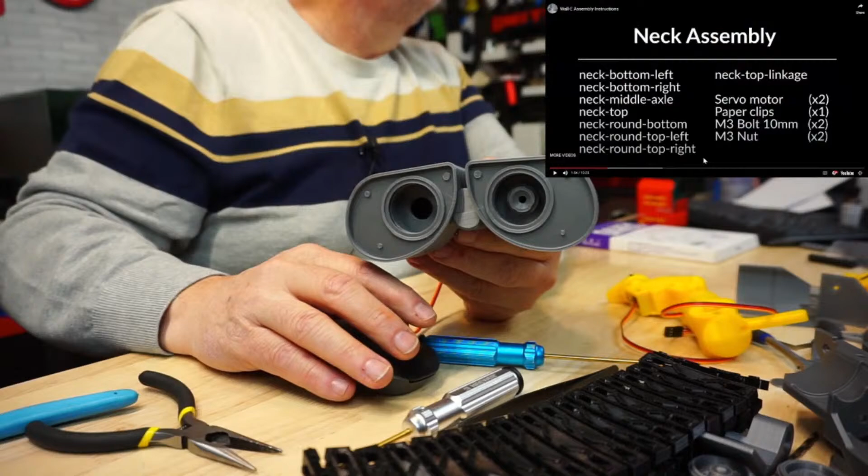I did go ahead this week and assemble Wally's eyes. Let me go ahead and switch over to this guy. So there's Wally's eyes. Now, I didn't put the lenses in. What I've decided I'm going to do is build 2 Wally heads. And the reason why is there, oh, I see, hang on a minute. That's kind of freaking me out over here. That shouldn't be there, this should be this screen right there. There we go, and I'm going to build 2.

I didn't put the lenses in this one because I wanted to get this going and get Wally going. And I refused to buy the lenses that somebody showed me on Amazon because they're so darned expensive. So we're going to do this like this. I've started printing another set of things for Wally's head like this, and these guys and whatever. But then I'll do another one with lenses, and I can just give him a head transplant when it's all done.

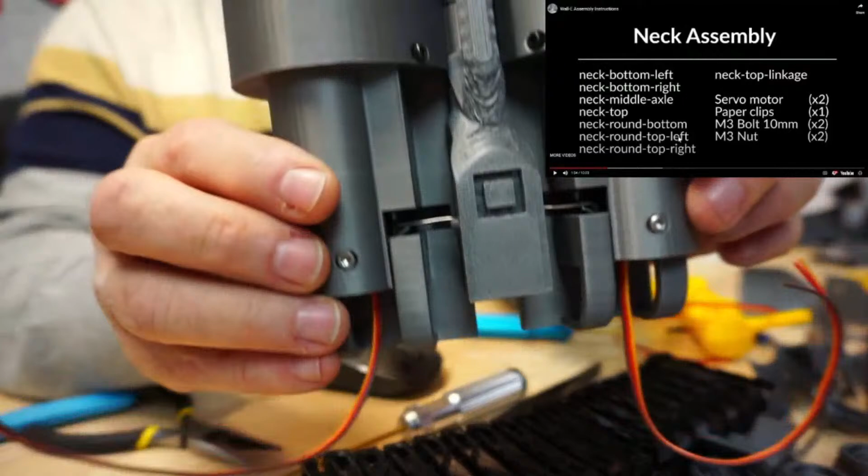But we did end up getting the Paperclips in, and you can kind of see where those Paperclips were connecting. It was a trick and a half to actually get the right length, and I'm hoping I have the right length in there. But we got the Paperclips, which are connecting inside these little grooves here to the servo, which is buried in there. And then they clip on over to this little middle part that kind of connects the whole eye system together. And again, we glue the little tab on the end once we slid that rod in.

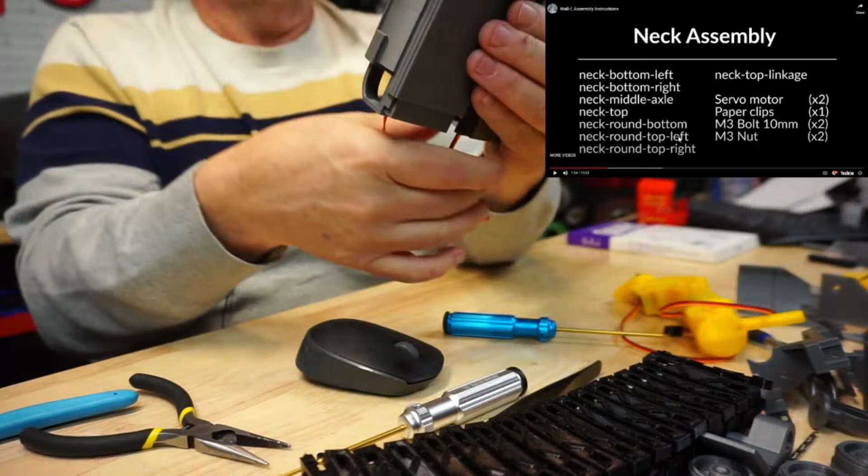And yeah, so that's Wally's kind of eyes all kind of connected together. And then we have, of course, the wires coming out for the servo. Yeah, so there we go. Okay, so that is Wally's head.

Well, that's Wally's eyes. And then we can see here where his neck is going to connect up something like, come on Wally, cooperate. So his neck is going to connect up something like this, or maybe I have it backwards, but we'll figure that out next. So we're just going to continue on with the build.

I did get a pack of servos, it's a 10 pack, I believe I got on Amazon. Yeah, it's a 10 pack, and these are the MG90S servos that we got, and it just came as a 10 pack like so.

So we have all the servos up here and all the servo gizmos down below. We have plenty of servos to continue and finish this build. As I pointed out last time, we have all the electronics in now. There's 4 electronic components, these 3 plus an Arduino motor shield. So we pretty much have everything we need, we just need to get the build done now. I'm hoping I don't run into any more snags.

Okay, so without further ado, and I know this is a mess here. It's a real mess because I still got all these parts on the table, and lots of spare parts, but I think we're just going to go ahead now.

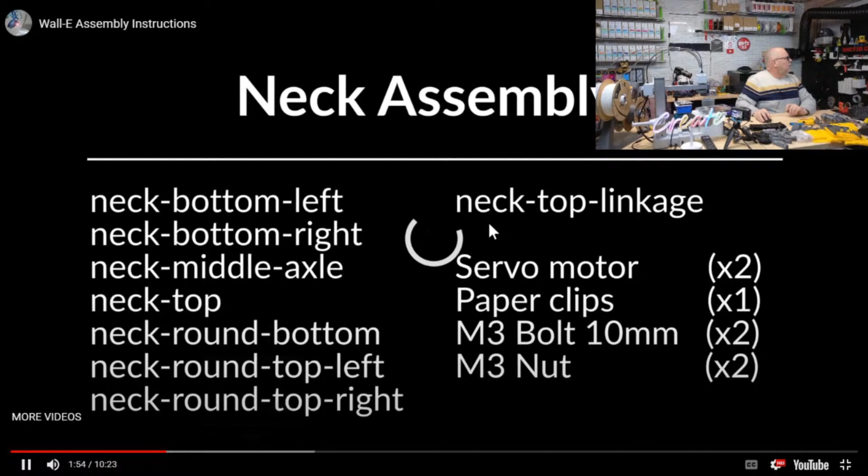Let's just see if this is actually going to play for me. Oh yeah, see, we're lagging. So this is the neck assembly that we just finished doing. Now, there's two pieces I haven't put in yet. I'm just going to let this play for a second. We've got everything done up to that point. Yeah, we're lagging, major lag here. I don't know how that's going to affect my stream. Let's just see what we have here.

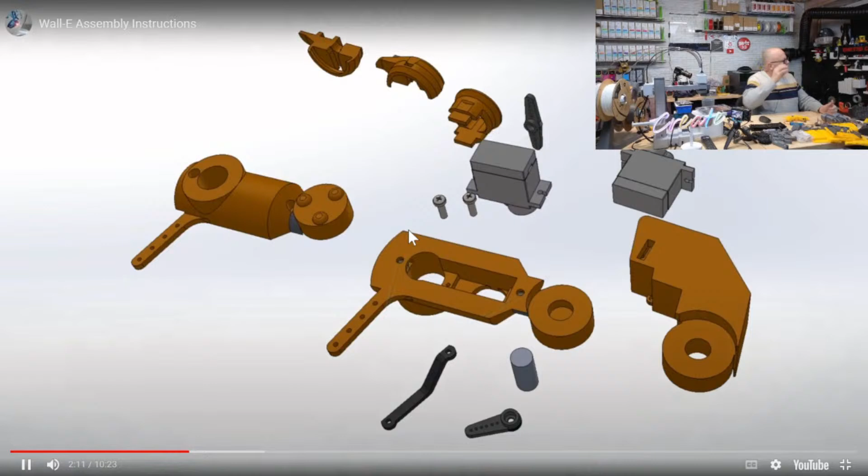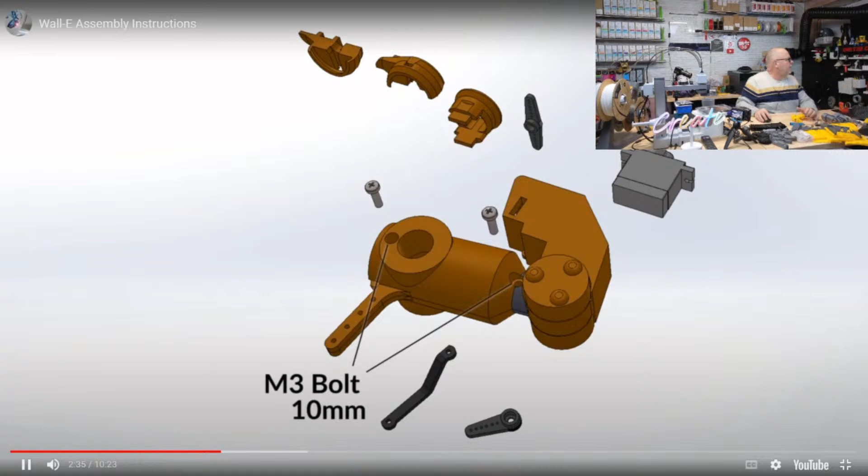So we've done that part, we put that servo in, we've attached these pieces here. So this is what we've done for the neck so far. And then we've screwed those two screws in. Yes, we have. I'm waiting to see what's going to happen with these pieces right down here.

Oh man, as soon as I move my mouse. Okay, yeah, this is just terrible, terrible. I definitely need a new computer, something a little stronger.

So we've done that, we've got that servo in. I didn't see where that piece on the bottom went, so I've got to see if they get to that part. We decided not to, yeah, we did glue those together, and we did not glue that down. Rather, I used the screw to hold the servo part in.

Okay, here's where we're going to add these two parts. This is going to go onto that servo, and then where is this other little piece going?

Use paper clips to connect linkage, more paper clips. Okay, let's just see how we're connecting these linkages. Okay, it really didn't show me where we're connecting, where we're using paper clips. So I'm going to back this up a bit here.

Forgive the lag. There we are. Let's pause that. Okay, come on. This is going to just frustrate me tonight. You watch. Let's pause. Oh, don't do that to me.

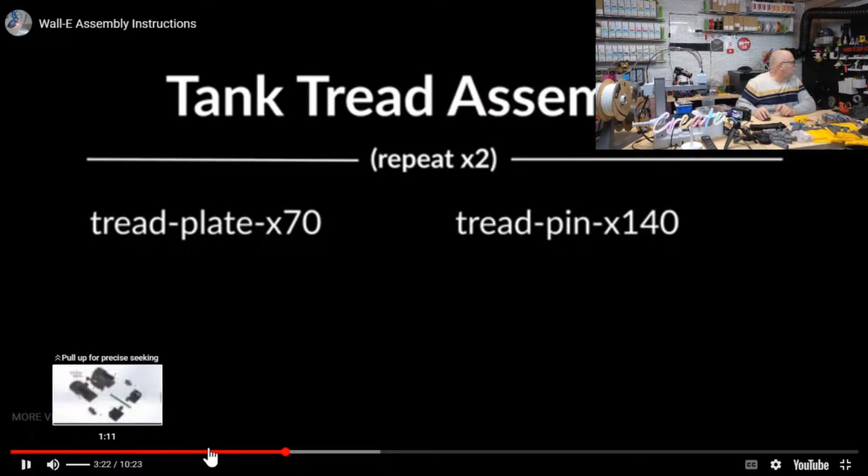Okay, there we go. Okay, so let's get back to, let's do my overhead here. So we have this piece built as they were showing right there. And so I've got that on there.

Likely you're running Windows 95. Yeah, I know, no kidding, right? It's crazy.

So we need that other black linkage piece - it's the curved one. I just got to find that piece. I know I have it right here. There's two of them actually, since I always print spares. So there's the one piece that's looking like this, with the bent piece coming up like so.

And then I need that other piece for the servo. Let's see, right here. It's this one here, with this guy sitting like this. So we need to attach this to the servo like so.

Okay, and then we're going to grab a little screw, which I thought I saw one little screw left here. And there it is. There's a little screw right there.

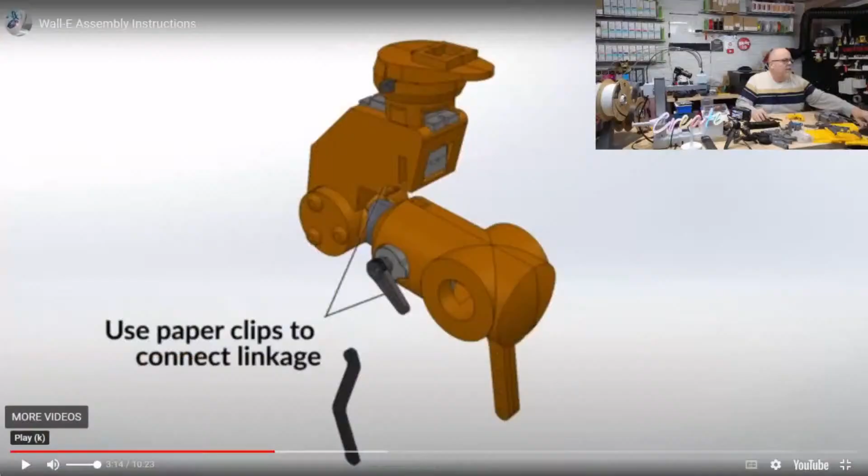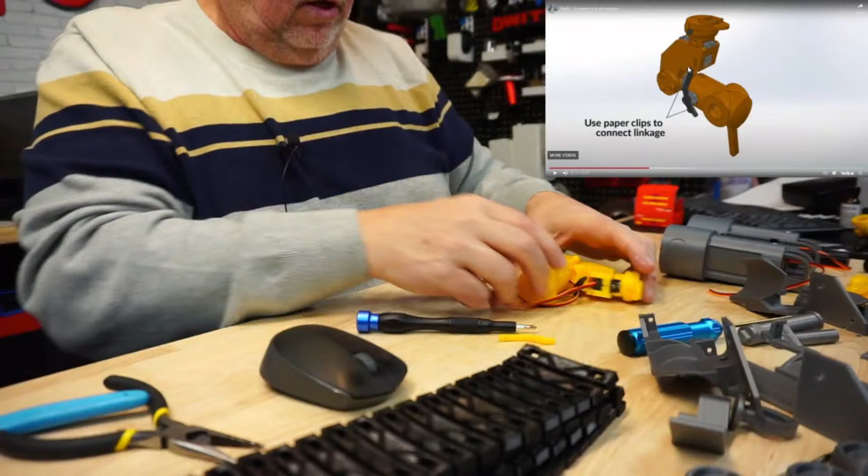And then they say, if you look at this one, they say to link this part with a paperclip here, but they don't show it actually. So hang on, now let's see what they're telling me to link - they're telling me to link that to that with a paperclip. So it looks like we're going in the 1, 2, and the third hole, and then in that little hole on the side here. Okay, so if we look here, looks like they're going in the third hole on here, and if you look right up here, you can see that's the other hole where they want the paperclip to go. So fortunately, because we do have paperclips...

You meant to tag me. Did I get your Amazon US list? No, I don't think I did yet. Oh, stop - I didn't want you to continue playing, you silly little video. Stop.

There we go. Okay, so I'm going to grab my paperclip again. These are much easier to work with than what I was trying to work with last week. Okay, so let's straighten this paperclip out.

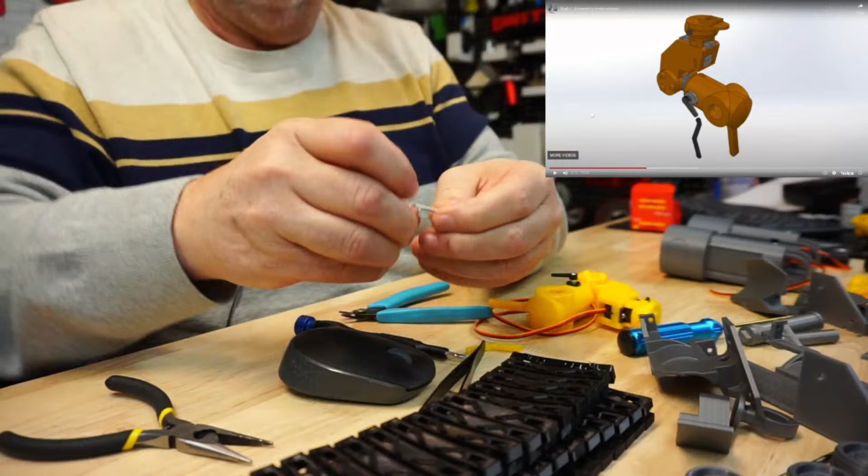Okay, so we're going to cut this piece off. So we're meant to go from about there. So let's make a loop for that first one. Okay, and then this will go up through here, and then we'll twist that one.

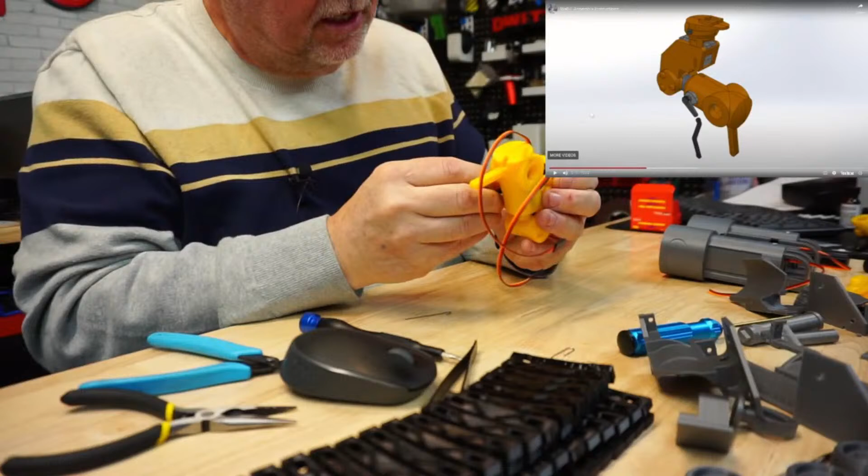So this piece is going to go on between here and here. Okay, oh, so we just need a piece on each end. That makes better sense. Okay, so let's do that. So I'm going to go ahead and put him on like that. We are going to come on and bring this piece on like that. I know it's hard to see. Actually, I'm going to make this bend a little bit bigger, so we're going to make that a little steeper, like so.

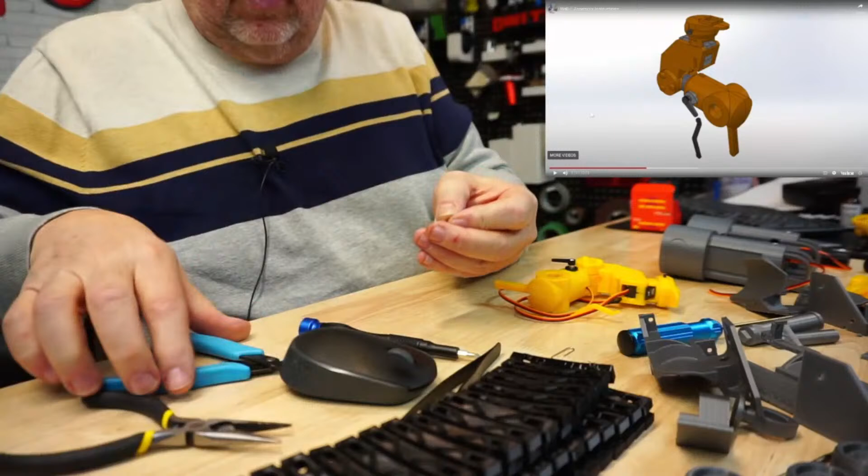And I'm just going to cut this little piece off here. Okay, we'll come up like so. We'll put this piece on like this. That will allow me - you almost need 5 hands here to do this. So I'm going to put that on like so.

Don't move. So easy in the video, right? And then that'll allow me to take this piece, make sure this is pulled up, and then we'll just bend.

And that makes sense now. So the neck isn't going to be flimsy because the neck is the up and down movement. The neck's going to be controlled by this servo. So I'm going to hold that, and we're just going to try and get this piece bent over. Come on. There we go.

Come on, you're falling out of the hole. Tell you, you need 6 hands to do some of these things. But if I can do it, unless you have bigger hands than I have, anybody can do this. There we go.

So now that piece is kind of bent into position. And if I snip this off, let's see where that's going to go into my hand. So then we have that piece kind of tied in there. And now we're just going to put the other one so it ties in onto the servo, like so.

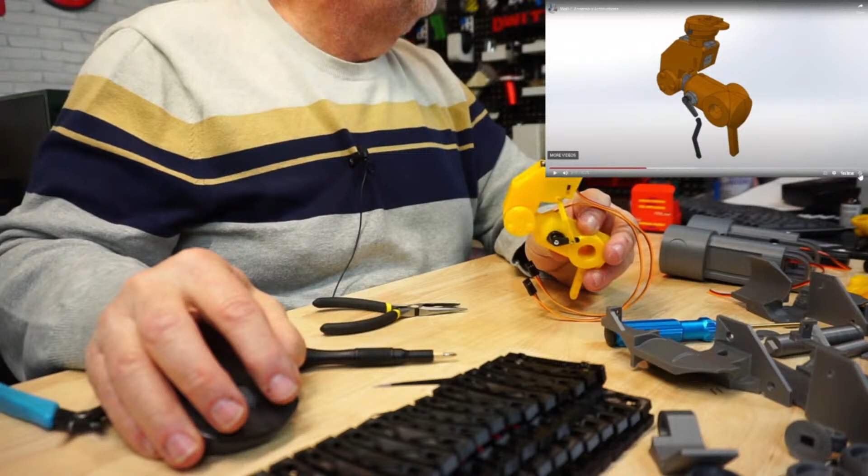The servo is going to control. Oops, sorry. Actually, what I should do here, let me do something for you guys, so it'll be a little easier to see. Let me move this over here, and then bring this back up. It's all about screen position, you know.

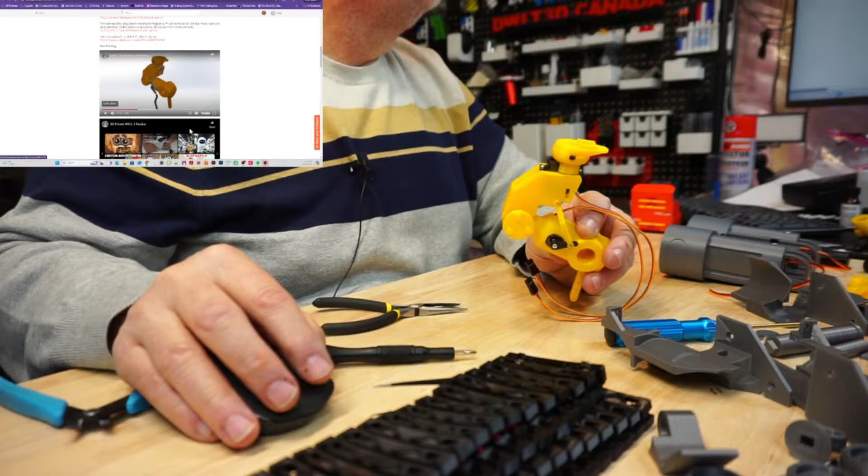There we go. So it looks like now what's going to happen is this servo will control the up and down motion of the neck, like so. Okay, I'm just going to try and get these clips clipped together a little bit better.

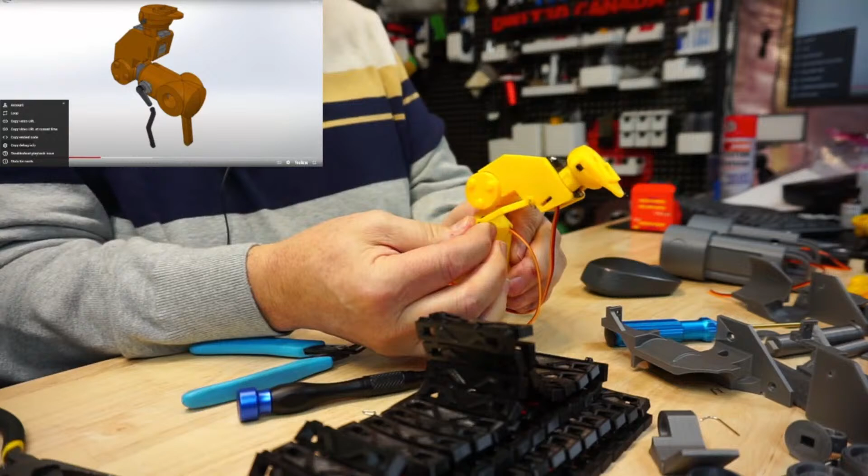So there we go. So now that servo is going to definitely open up and lift his head and neck as we want to see it. So there we go. There is the neck assembly kind of almost finished. We got that on, we got that on. Okay, so let's go ahead and see what is next.

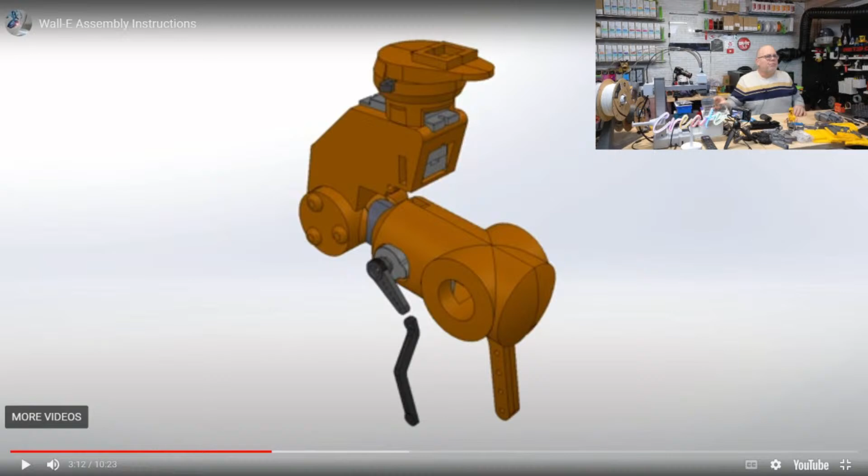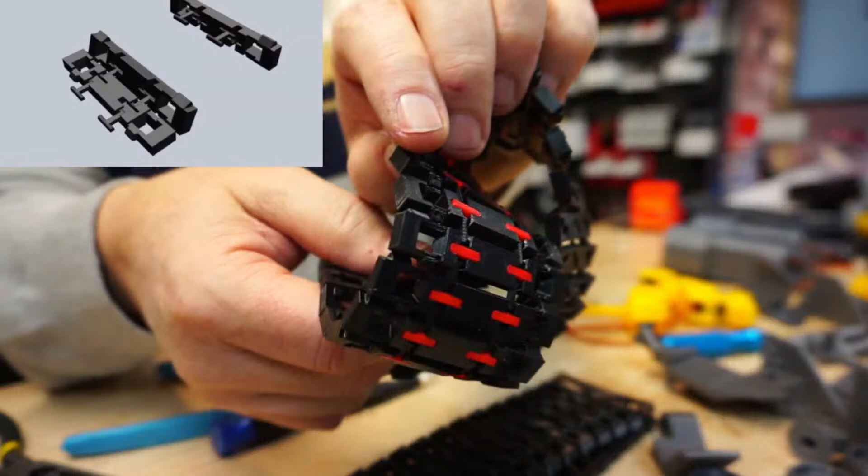Okay, so moving on. We've done this, we've paper clipped that to the servo, there we go. So now we're going to track assembly, which we've done, remember. And remember, in the track assembly we added those little inserts that go right in here, in between these things to prevent them from coming out. That's what we showed you last time, those red inserts we inserted to prevent those pins from falling out. Oh, I think I forgot to put those inserts on Printables. Dang, but I will, I have to. They're fast design, but I will put them on.

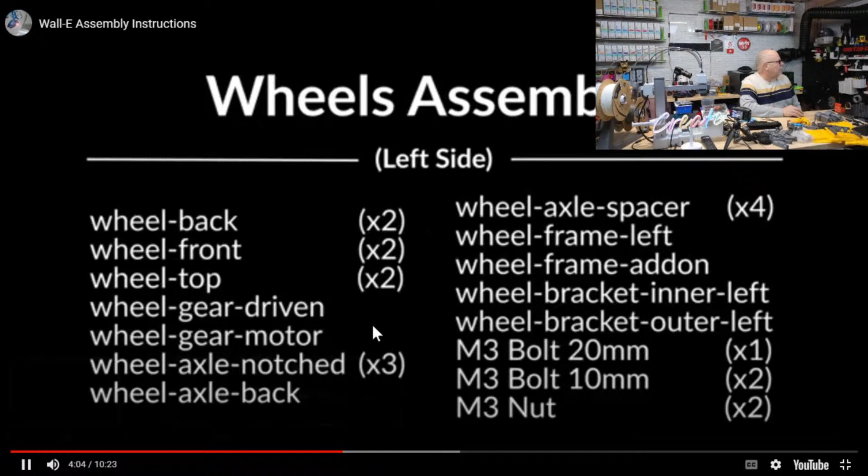So there we go. Now we're going to look at assembling the wheel assembly. Let's go ahead and start the wheel assembly now that I have all the parts and all the servos that we're going to need.

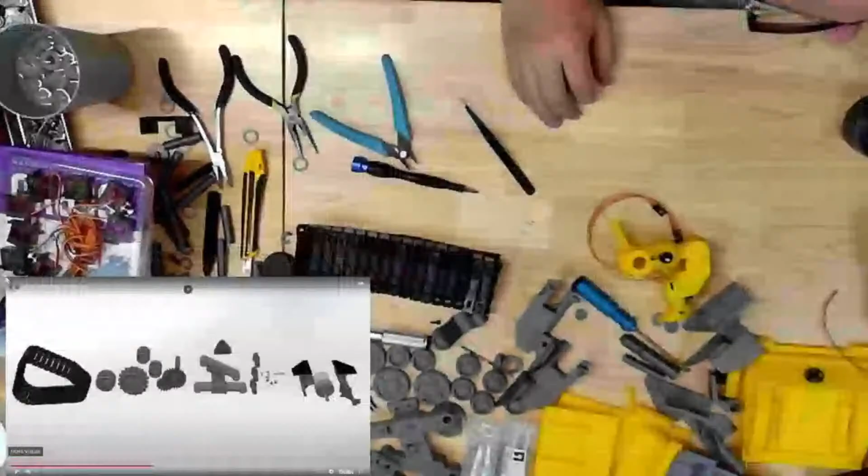Okay, so I'm going to pause it there, we're going to look for these parts. Let's go to the overhead again. So we have our track, there's two wheels we're going to assemble, so we have our track for the one. I'll try and give you guys the same view from left to right, or right to left, I'm going to do it mirrored since I'm watching it here. So we have a track, and it looks like we have two of these guys. Let's move the neck out of the way here. And then we have these guys right here, two of these, okay, these are printed out of Fiberon. It looks like these were the big ones, I believe, here, because the smaller ones are here, and we have a couple pairs of small ones up here.

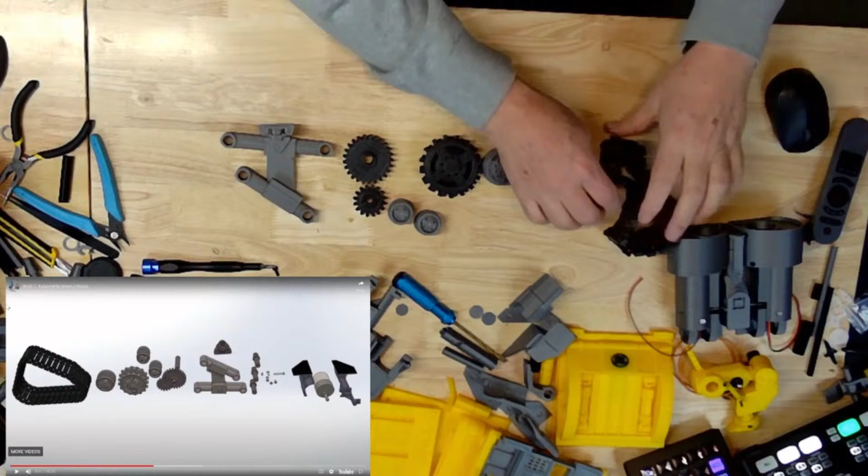So we have this one, okay, let's move these over a little bit. Actually, let's zoom this out so we can see everything that's going on. We're going to zoom... whoops, no that's not the zoom, that's the rotate, oh that works, that works too. So we have this, these guys, these guys, these guys, these guys here, this guy, and then we have three of these, one, two, three of these here.

Okay, we have some screws which we're going to work on. I did not say to go ahead, stop, stop, stop, I did not say to move. Stop, no, come on, the lag in this thing is just going to drive me bonkers. There we go, and then we have, it looks like, this part.

Is this the right one? No, it's this one. We want this one here. Okay, and then the bottom half, which is this one here. Oh, and then the motor.

Okay, there's where the motor comes in. Now this is where I'm not sure which motor I'm going to use. This is where we got to decide on the size of the motor. Let's just pop this one out. I have 2 different size motors here. Obviously only one of them is going to fit. I'm pretty sure one of these is the size they have in the parts list, but we'll find out very quickly whether or not it is.

Oh man, they make Fort Knox getting into these motors. So let's see, I have a feeling this is not the right size motor. Or maybe it is. Maybe it is. Whoa. Let's just see. No, I think it's the bigger one. I think it's the bigger motor I need. So let me grab the box. Here we go.

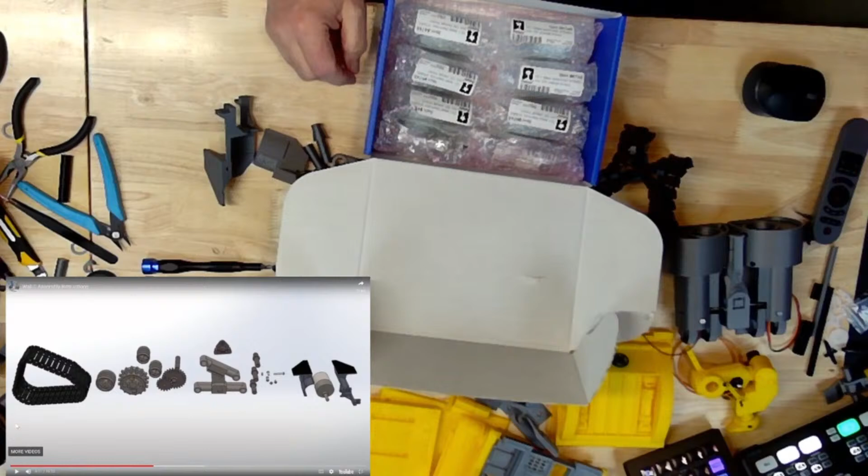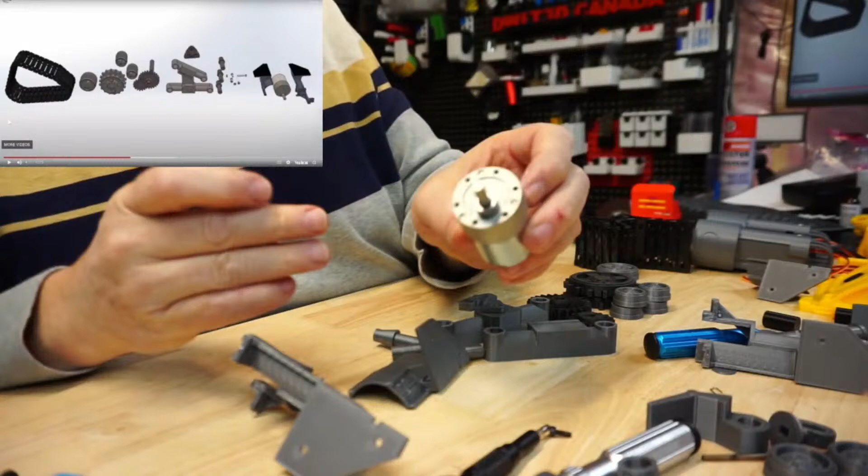Okay, so this looks like a bigger motor. So those are the 2 size motors I have. I think it's this one they're looking to use, but I will find out. Yeah, I'm pretty sure it is, because if you look at this one, it's like a center shafted motor, whereas this one has the shaft towards the bottom, which if you look on the drawing right here, it looks very similar to the larger motor. Good, so they're using a more powerful motor, which is this one right here versus the little one here. So I can put these little ones away.

And we will use this motor in place. Yeah, this looks like it's going to fit in here a whole lot better. Whoops. This guy here goes like this. This motor is going to sit in. Yeah, there we go, so that's going to sit in like that. And this one is going to sit in just like that. Yeah, that's definitely the right motor for this particular project, which is good because that's a much more powerful motor.

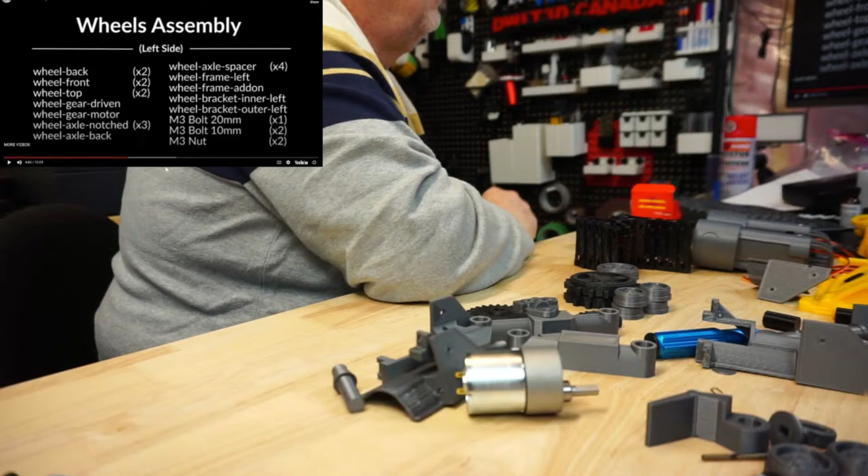Okay, so we got everything there. Let's go ahead. Oh, I just need to see what hardware they want me to use here for screws. So let's go to this screen. We're going to need M3 by 20s, 1 M3 by 20, 2 M3 by 10s, and 2 M3 nuts. Okay, let's go grab those, and we'll get them all together.

I looked at everything and I'm positive I have everything. So we need 1 M3 by 20 bolt right here. Let's put this one away. I don't know where that went. 1 M3 by 20, 2 M3 by 10s. Oh, those are in my other drawer. I'll guarantee that's probably one of these ones. And M3 nuts, 2 M3 nuts, so we'll grab a couple nuts out of here, 1 and 2.

And then we need two M3x10s, which are these guys right here. 1, 2. Yeah, this must be an 8. Okay, so we'll put this back, we'll throw that 8 back in its hole. There we go. Okay, so let's go ahead now.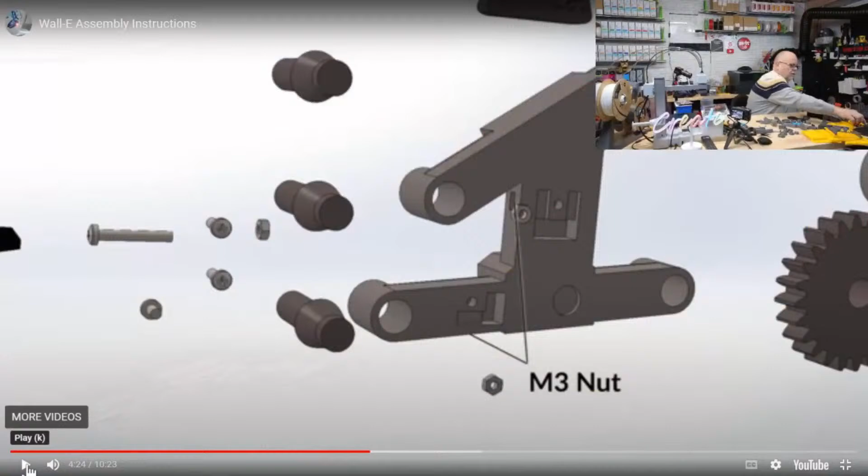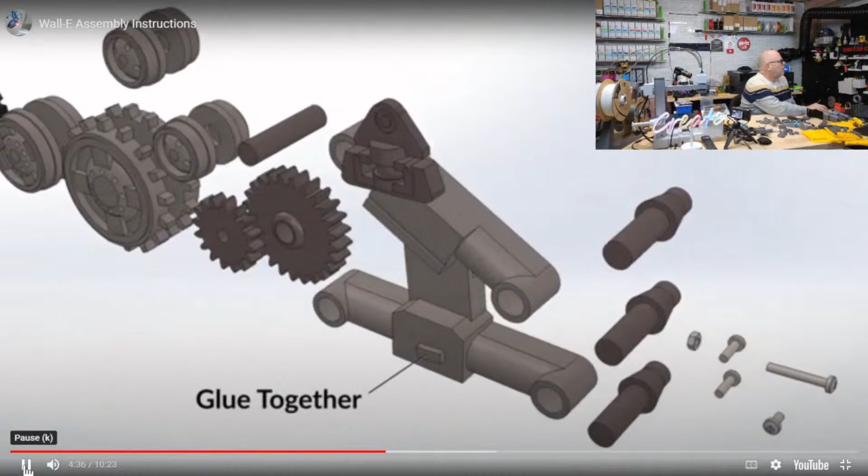Now I'll let you play forward a little bit. Okay, so we're going to come around the back. And we're going to put a couple - I just realized I'm not showing this. There we go, we're going to put some nuts in some nut holes. Okay. And we're going to glue that on. I've already done that, I glued that together already, and I think I got it crooked.

Oh well, but that's okay. You're saying, how can you get it crooked? There's a tab there, I know. Maybe it's not crooked. Okay, then we have an axle that's going to go through the top one - oh, the bottom one. And then these 3 are going to go on. So let's do this, 2, 3. And that's all going to glue wheels on the axles. Okay, so let's get going to that part.

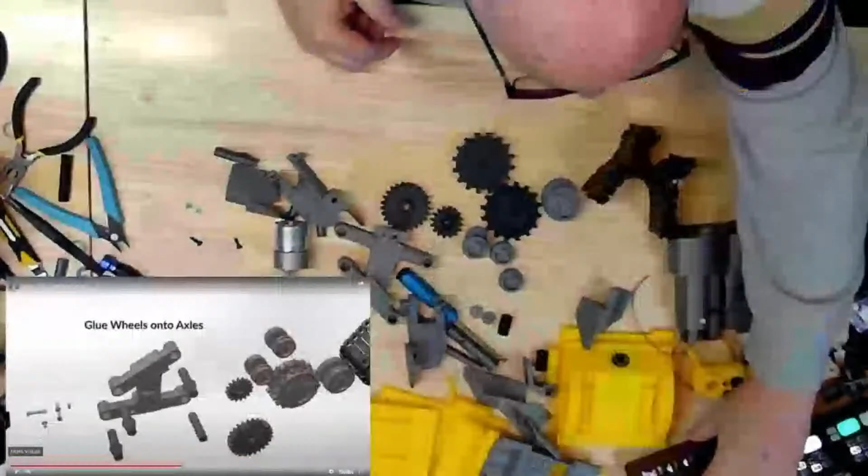Okay, so we have this guy. We're turning him over. We are putting M3 nuts in here. Oh yeah, we turn them over. We're putting in here and in the bottom here.

So this bottom one should be easy to do. Hopefully they're going to sit in there relatively nicely. Let's push it in. It doesn't want to go in. Oh, do I still have some support material in there?

Or did I already put a nut in there? Almost looks like there's already a nut in there. Hold on. There's already a nut in there. Okay, I already put nuts in here. Did I do that last time? I must have. What about the side one? Is there a nut in here too? There is. I already put the nuts in there.

Hi, Timothy. Okay, so we come around to the back here.

We are going to grab, I believe it's that one there. That's what we're looking for. Yeah, I want to make sure that I have 2 the same size of this. Okay, that's these guys.

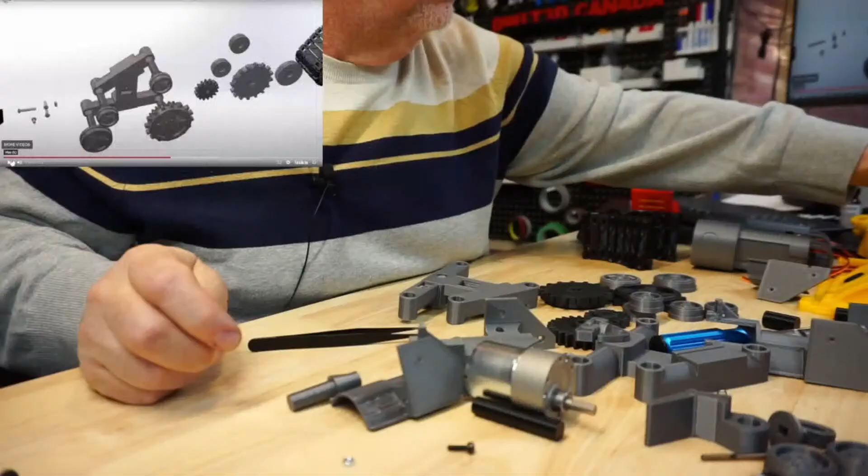Let's see, and these are, I know I printed these in a couple different colors. That's these ones. Make sure, yeah, I printed these in black and in gray, but I'm going to do everything in black for this. So I'm going to have to ream this hole out in order to get this gear in here.

So first thing I'm going to try is I'm going to grab my, where is that tool? Where is my tool?

Is it just you with audio popping and cracking? No, probably not you, just you. I am a little hot on the audio. Let me turn it down a bit. There, turn the audio down a little bit there. It might not be so bad with popping now.

I turned down the mic a little bit. I have a reamer tool here somewhere, right here. I'm going to see if I can ream that hole out a little bit.

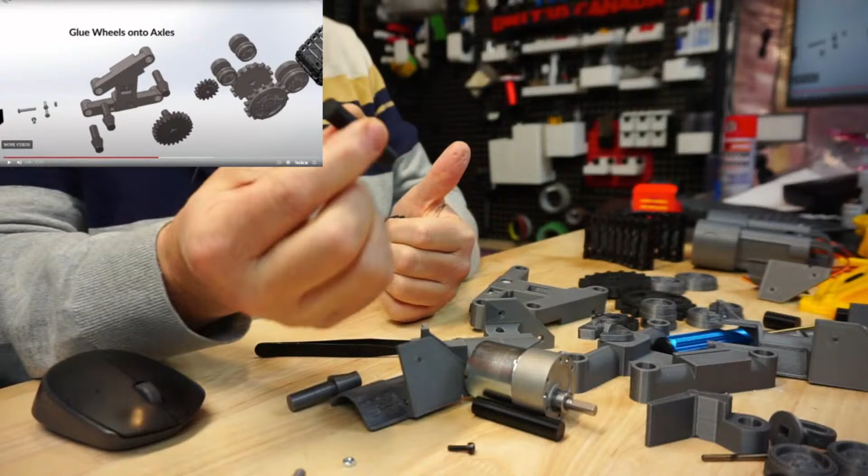Oh, these are really tight. I may have to reprint these axles at a smaller size. I don't have a drill bit big enough to drill that out, or do I? Hang on. No, I don't think I do.

I'm just going to do a bit more, keep reaming it a little bit at a time here. This might work.

Yeah, that's exactly what mine says, but I just haven't had a chance to look at it and see if the wiring or whatever, see if a plug's come loose.

Okay, I just need to get this enough to get that piece in, because we glue it onto it. So obviously, okay.

Okay, let's see now. Oh, starting to get there. I don't want to get that in too far because I won't be able to get it out. But we're starting to make some headway.

This reamer just, maybe if I clean the reamer off. This is doing what it's supposed to do, taking just a little bit off at a time.

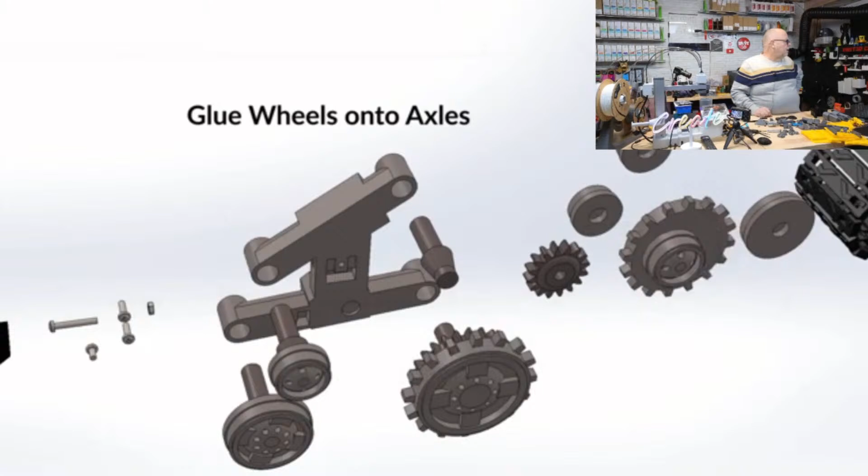And then I don't want to mess with those shafts because look, they slide in there. And then we come on the other side, and I just want to see where that little gear is going to go.

That large one's going there, that's fine. And then we have the caps that are going to go on. And we have these, so we're going to put the other two caps on the other ends.

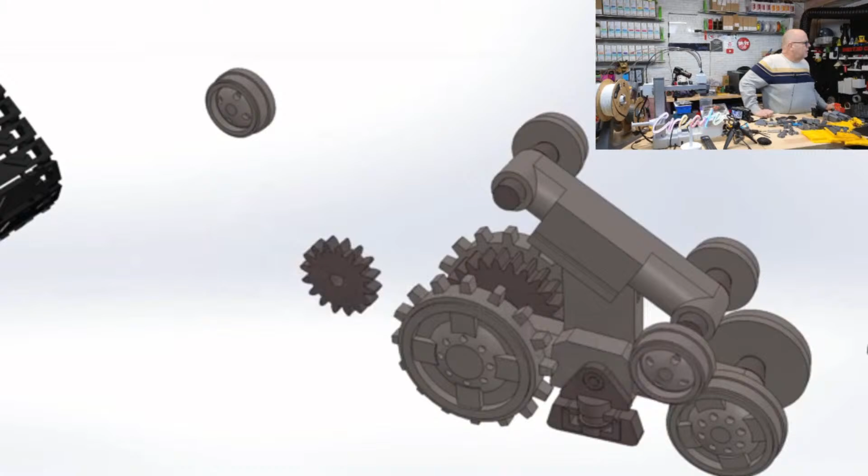Okay, now we put the belt in, which is fine. We do that before we put the last gear or piece on, so that we tension it with this. But where's that last little gear going to go? That's what I want to know.

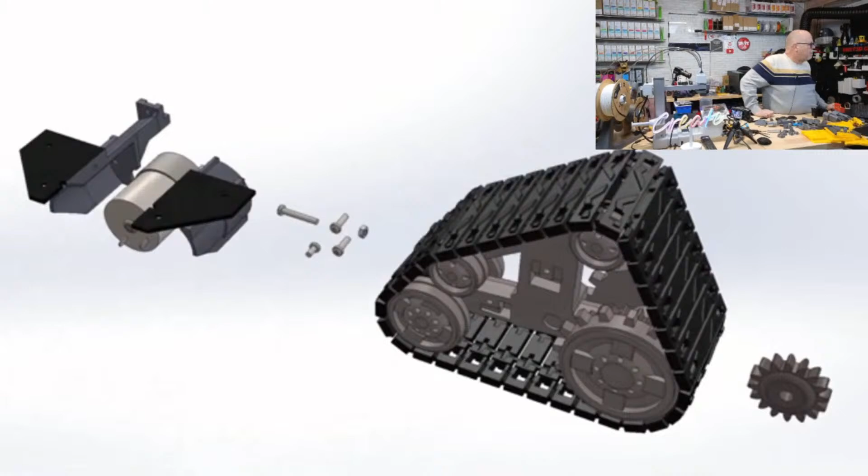Oh, that's the motor. Yeah, that last little gear is going on the motor shaft. Okay, fair enough, let's pause here at that. I see exactly what's going to happen. So this last little one, which is this one, has got to slide over the motor.

And yeah, that's too, oh, that's very tight. Yeah, that's a very tight fit. So all of these gears have to have these tolerances opened up on them. And yeah, that's extremely tight.

What I think I should do - I did these out of Fiberon just because they're gears, but I think if I do these out of PLA, I'll be just fine. Maybe if I do them out of PLA like everything else, I won't have any problems with the tolerances. So let's just put these aside. I think that's what's going to have to happen, unfortunately.

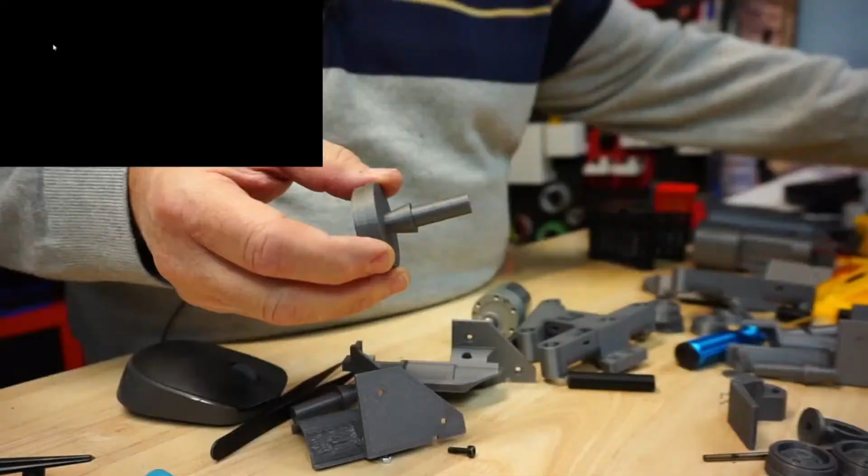That's too bad, but I can do some other stuff like that. For instance, these, if you look, which go on here, I think that's the issue - because of the filament I ran them in, I had a little bit more, I don't even know what you want to call it, but these ones, oh man, that fits on too good actually.

This just pressure fit on there. And this one fit on there perfectly, pressure fit. So these ones, the tolerances were good. Yeah, so those tolerances were fine.

So I think if I just print the gears in basic black PLA, we're going to be fine. I just wanted to do them out of Fiberon to try it because it's stronger, and see how the material printed, for instance. But PLA is going to be strong enough for them as well. Based on this, the tolerances on these, if I print them out of PLA, are going to be just fine.

So let's do that, let's do that. I don't know how long they'll take to print. Let me go ahead and find the files.

There's my files, I got to open a slicer here real quick. And there we go, and then I'll just get these started and we'll see what else we can move along on.

I can at least get part of these things going. So okay, let me make sure the black filament's loaded in here, we're going to run this on the P1S. And this is black, yeah, this is basic black PLA.

So we're going to cheat here, just because I've got this loaded already. We're going to use a non-Polymaker filament, we're going to use some Bambu filament for this one. We'll use Bambu filament for this one and cheat.

See, now my computer, I'm trying to open a slicer, and I'm sure my stream is lagging again.

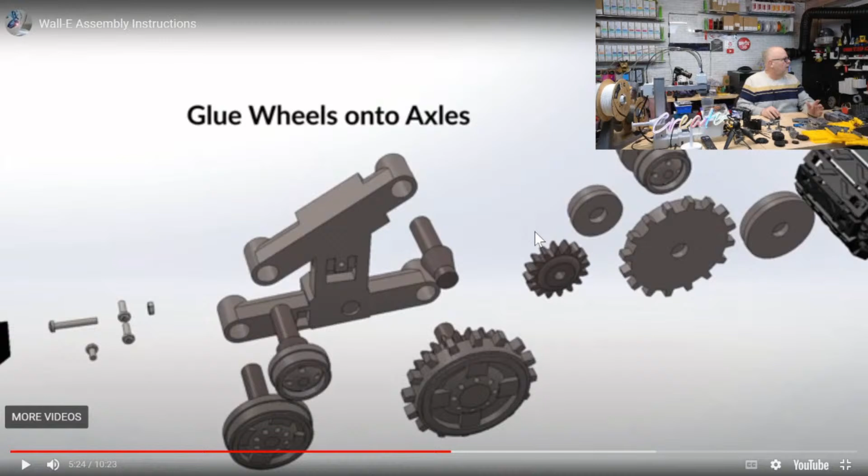Okay, so in the meantime, I'm going to go ahead and work on these parts here. I can get pretty much everything done except the gear parts, so I can get a little bit of a head start. I'm just going to go ahead and get these pieces done that they're showing right here on both sides, because those are just snapped together. It's the gears that I can't do right now.

Yeah, then we flip it over. And of course, we're not going to do this portion, but we can do the other three portions on that. So we can go ahead and do that.

Let's do the overhead here. So I can go ahead, definitely go ahead and do that. So we can come on this side. We've got the large one that's going on the bottom, which is over here, like so. And then that is mating up with another large one over here.

And these don't even need glue. These are really, really tight fit on these. Let's just get this squeezed together. Did that go in all the way? It did. So that fits. Okay. Although you'd think that should go in further, but these are all the same length.

And you have a little one that's going, two little ones that are going up top here. So then on the other side here, again, don't need to glue them because those things are a nicely tight snap fit. But I don't know if that play is good. It doesn't show, but maybe that's for a little bit of wiggle room on the tracks. But these pieces are all printed at 100%.

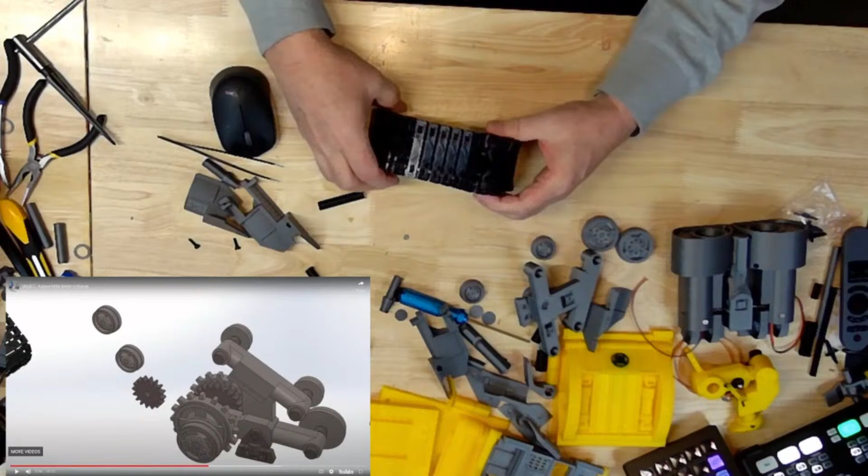Like so. And ride—those are just kind of the track riders. Look at that. Yeah. Okay, yeah, so I guess that little bit of side-to-side wiggle is okay with them. So we may as well do that to both sides. Let's go ahead and repeat that over here. Okay, so we're going to be on the back side here and grab some more of these guys here.

Ah, come on. These things here, when I printed them, I didn't even notice, but the slicer put a brim on them. I got these brims off as best I could, but obviously I didn't get them off perfectly. But I can't find my little deburring handle tool. Where did I put it?

It's here somewhere. Oh, there it is. Oh, no, that's not it. Where's my little deburring tool, guys? My deburrer. I've misplaced my tool. Oh, that's all right, I'll just take my knife.

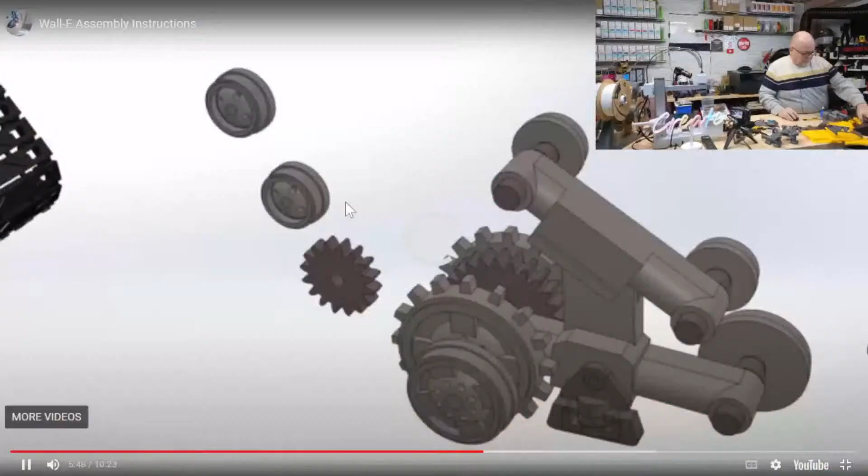I'm just going to look. I think I can get the motor sections kind of put together if we look at the next steps here. You're not missing it now. No, you're not.

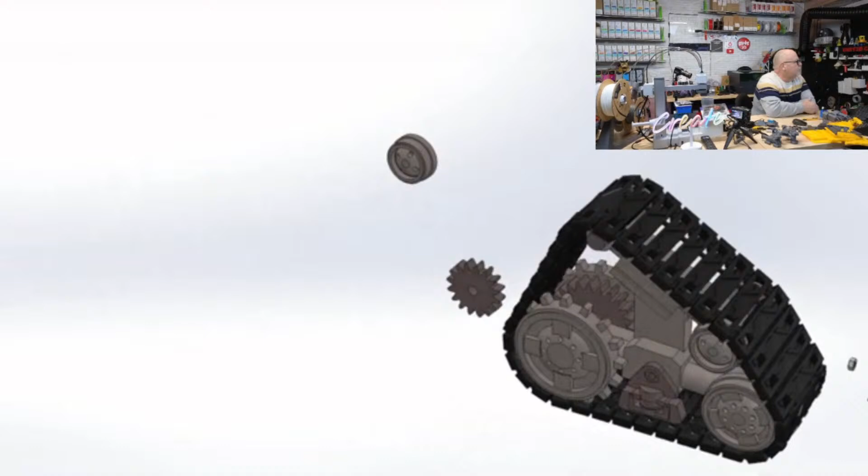Soldering some LEDs for your head -- cool, I know it said tool head. Okay, so this comes into play after this. Once we get all the gears going, we're going to bring the track in, of course. Of course, I didn't need to put that last piece on. I can always pop that off, no big deal. We're going to pop that last piece on.

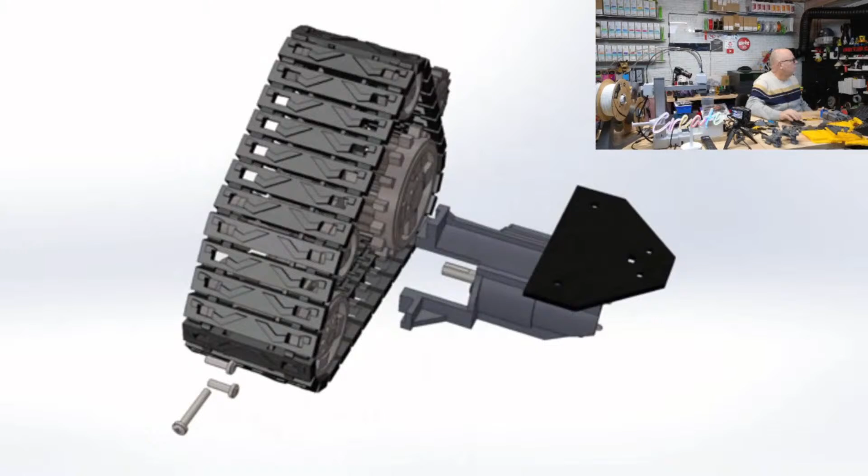And then we are going to enclose the motor. So this I think I can go ahead and do right now. So we're going to shut the motor in. Before we put it in, it looks like the motor is going to close and close. Okay, then it's going to go in and be screwed in place. So I can't do anything -- oh yeah, I can put an M3 nut in there. But that's going to be screwed in place once it goes inside. We got an M3 bolt in there, an M3 6mm bolt. Then we got the gear going on there.

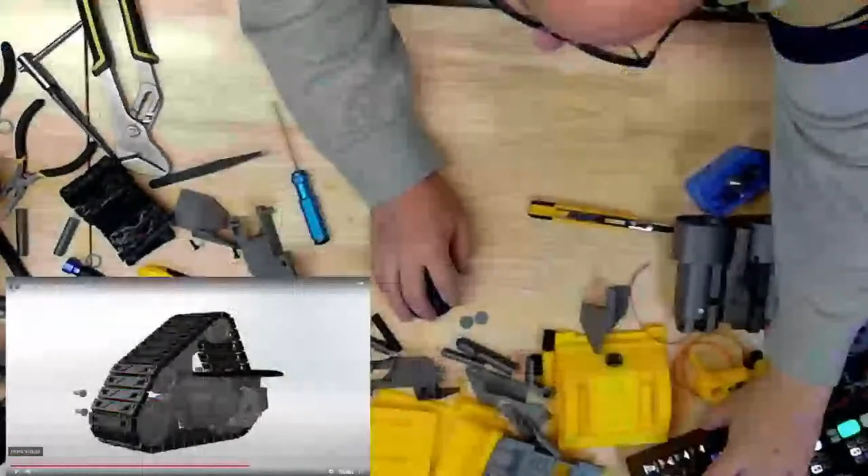Add glue, I don't know. And the whole thing is going to slide in. Yeah, okay, okay, well I think given the fact, let's just see. This was this side, okay.

Like so, yeah, I think we got to wait for the gears to be printed to do that portion. I think we do. Yeah, I don't think -- I'm wondering about that too, Big and Bad Joe. It is a keyed motor shaft. So, but as I say, the motor shaft wouldn't even fit in the motor as well. So we'll see what happens.

I don't like gluing if I don't have to glue, because glue is like, I consider glue permanent. And yeah, you can rip it off, et cetera, but yeah.

So in the meantime, I'm just going to grab a bag here, and I'm going to put -- I've got a bunch of spare parts on the desk right now that I don't really need because they're spares, and I know they're spares. These pieces here, because I am going to build some more eyes eventually, because the eyes actually do have it. Oh, there's the burring tool I was looking for right there. Told you it was right here, it was right here.

Yeah, so I think that's about it. This hand here, which we're not going to need, and that's a spare. Oh, I did 2 sets of motor parts for some reason. And this one we don't need, we don't need this piece. Just trying to tidy up just a little bit here, so we're not so confused. And we have our 2 tracks, which we're going to use here. These are all the body parts.

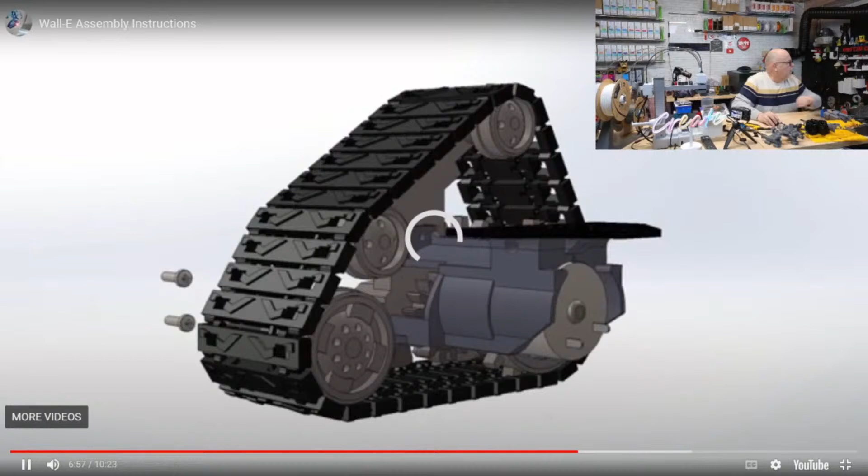Why did I just open? Oh, there we go, okay. Let's see what's going on after we get the assembly done here. So that'll be the track assembly, and it'll basically just say to repeat for both sides. Body assembly, okay, let's see if I can get the body started now.

Oh yeah, look, this looks fun. M3 nut, M3 nut. Oh, we got some servos going here. Okay, and on this side, okay.

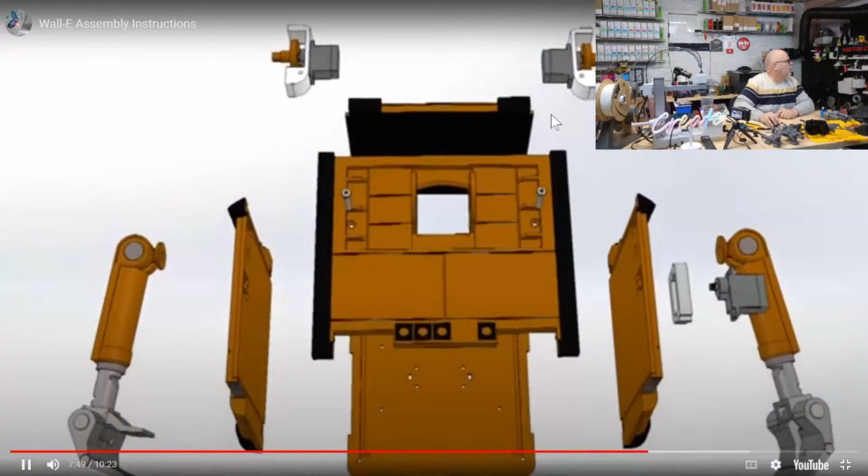Okay, let's pause it here. Let's go back here for real quickly, and I'm going to pause it here. I'm going to see what I need for hardware: servo motor 3, M3 20 millimeter bolts, M3. Let's grab some hardware out of here.

And we need 6 M3 20s. 1, 2, 3, 4, 5, 6 M3 20s, check. 6 M3 nuts. Come on, these are so small to pick up. Here, where's my tweezers? Here we go. 2, 3, 4, 5, 6. 6 nuts. Servo motors, and that's it for hardware.

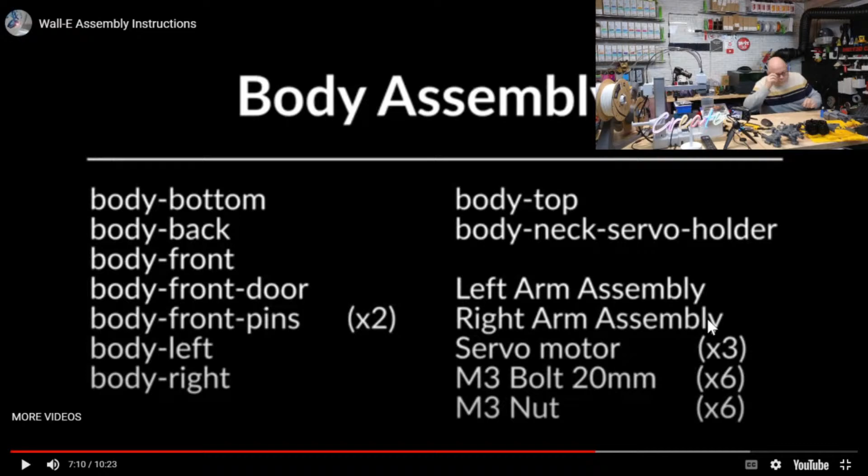Body top, body neck servo holder. Okay, cool, okay. Okay, so we got that. Here's our servo holders, this one and this one. We have a right and a left. Let's move along just a second here.

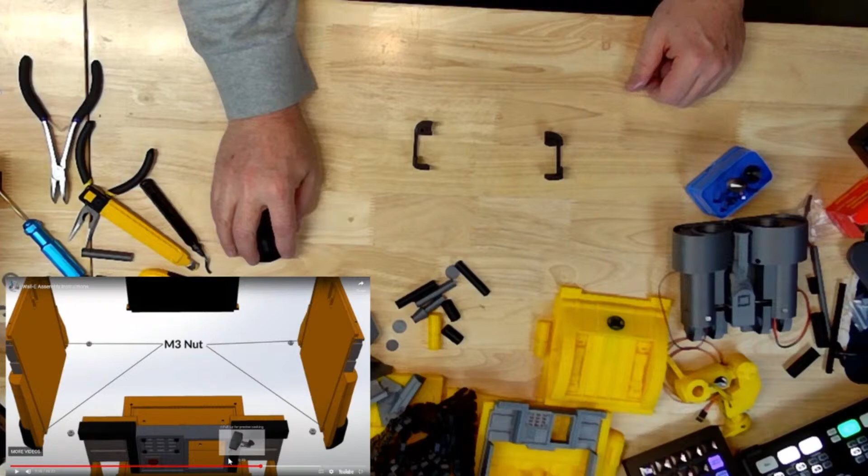So what they wanted here was M3 nuts on the 2 side panels. Okay, so we have our sides, which is, I believe that's one of our sides, and that's one of our sides. Here we go. So these are the 2 sides, and these are the nut holes right here and here, and here and here. So we need 4 nuts in these.

Okay, they're not very -- well, they're kind of just sitting in there. They don't pressure fit at all. They kind of just sit there loosey-goosey. So we'll just let that happen. Come on, come on.

There we go. So truth time here: who's just hanging around for the Polymaker draw, and who's actually hanging around watching me do this?

Okay, and then this other one here. Okay, get in, get in. Come on. There's always one, right? There's always like the one trouble child. Come on, for some reason this doesn't want to go in the hole. And that is one perfectly good looking hole.

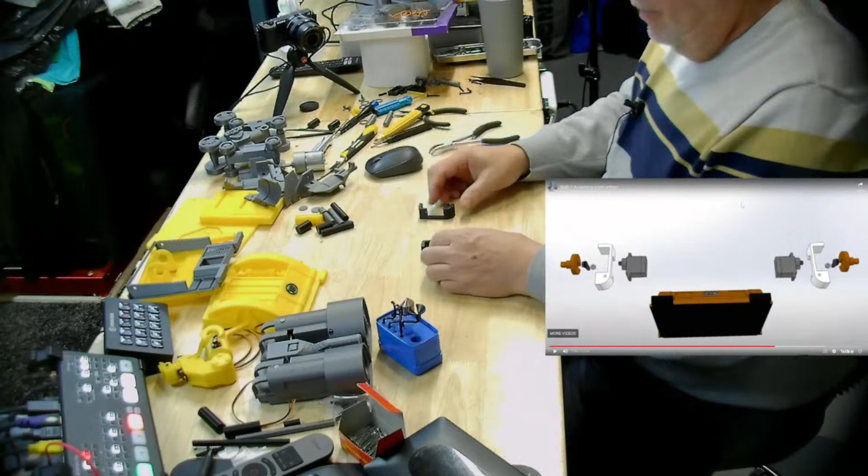Now we're talking, so we did the M3 nuts, we did that. Now we're going to do that funky zoom thing here. Okay, and now we're going to look at the servos. Okay, so we have, these are kind of like that. There, whoops, oh that's funky. And that one kind of goes, so these kind of line up like this. I think I like the overhead a little better for this. These kind of line up like that.

Let's grab a couple servo motors out of here. So we're going to take, oh man, who tied all these up? Why would you do that to me? Okay. Okay, there's one. There's two. There's two motors and two packages for the motors. Okay.

Okay, so then we're going to put the motors in from this way. That one's going to go like that. This one's going to go like that. Okay. And then we have some bolts that go in here -- or nuts, sorry. We have M3 nuts that go in the side.

One nut there. Let's get that pushed in. Actually, this one's nice and snug.

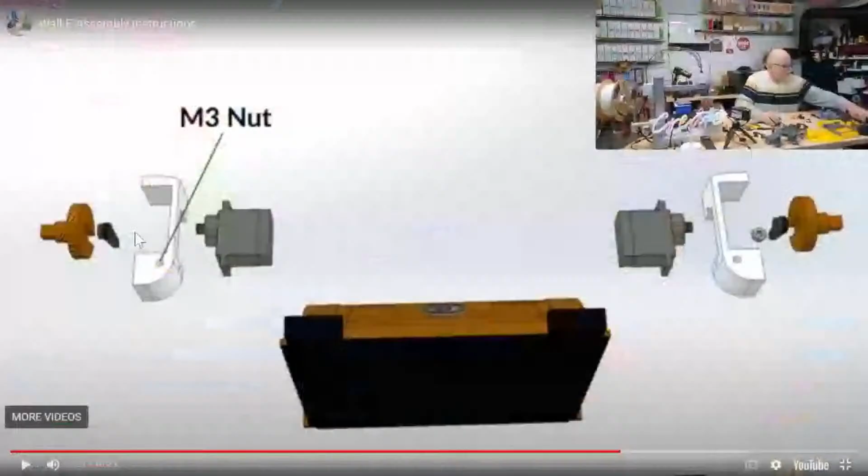Actually, let me back that up for a second. Something looks interesting here. Okay, they're both. This one shows it going in flat side. If you look at this black piece here, it shows it going in here. Let me make this bigger. Shows this black piece going in flat side towards the servo. It shows this piece going in with the long side towards the servo. I think this one's wrong because this black piece is going to have to snuggle up into here in order to make this thing work the servo properly.

What I basically mean is if I switch over to this guy here, where's the other piece that goes with these? This is the other piece right here that goes with these. So what I mean is it's showing one side going in that way and it's showing the other side going in that way. But these are going to have to nestle into that. So I think they've both got to go in with the flat side first. It makes sense because that's the proper way. I'm hoping that's just a misdiagnosis, a misalignment thing on the part of the instructions, you guys know what I'm trying to say.

So this one is going to go in this way, like that. Okay, so I can screw that little one in with here. Like so. Okay, and let's just do the other servo the same way.

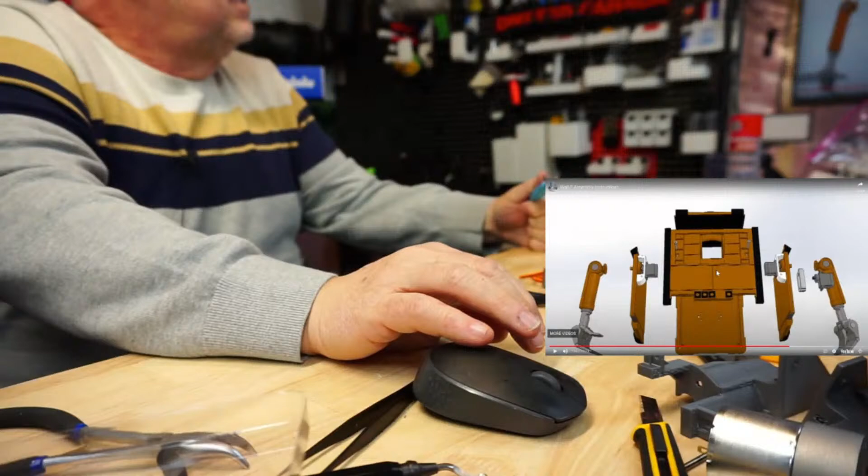I kept the video going too. I didn't want to do that. Stop, pause, pause. Now I'm stuck. There we go, my chair was stuck.

Your printable link gets a 404 error. Oh, shoot. Of course, why not? Let's just join in all the computer error fun I'm having tonight. Slow stream, audio issues.

There we go. That should help that stick on a little better, which it doesn't. So I'm just going to leave these for now. That's okay if that falls off. They don't say to glue that on, so I'm not going to do that yet.

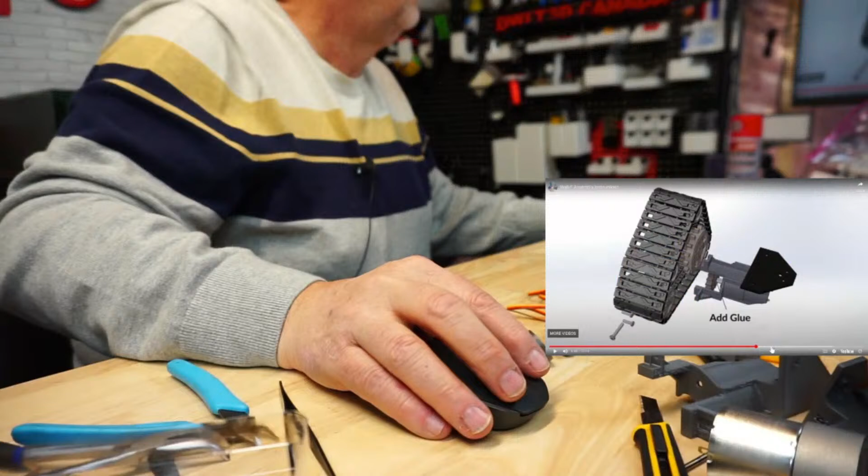So let's back this up just a hair. Okay, so we're at this point. And so we got these buttons. They're not saying to glue, which they are, mentioning glue when you're going to do glue. Glue together there now, okay.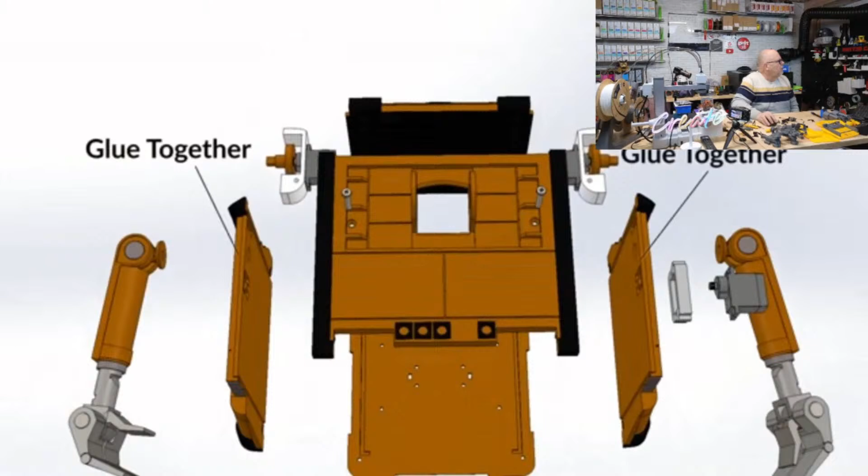So those go in those holes. Just want to back that up a hair. And let's pause this at the right spot. Right there, okay, so those are the side panels.

So this one here goes, we got to get this piece to kind of cooperate in here. And this goes in here like so. Oh, and this just all glues together like that.

Okay, and this is obviously the arm, where the arms are going to go. So that's why this doesn't have to really sit solid on that servo, because it's all glued together. See, that nut fell out. I knew it would. Both these nuts are going to fall out. Let's just leave them out till I need them.

So that's going to glue onto that one. And then this side, again, these nuts are going to fall out. Well, of course, these ones aren't going to fall out. And then this one glues onto this side, like so.

Okay, fair enough. So these are going to glue just like that. Yep, exactly, Brent, that's what it does.

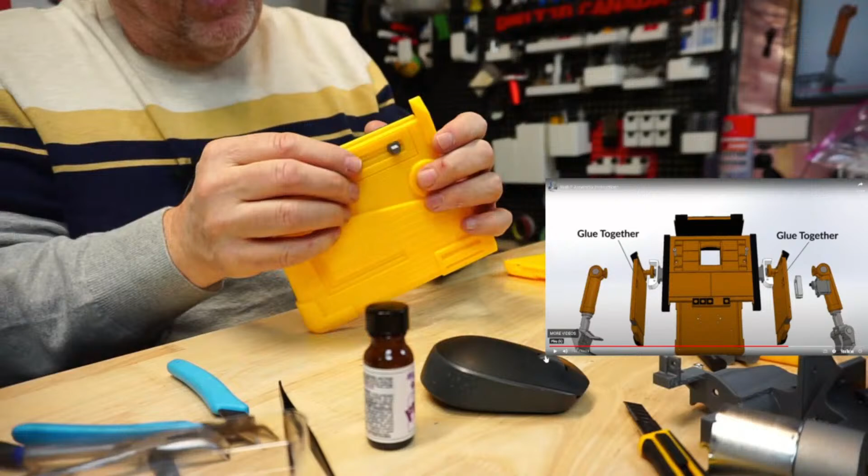Make them stay. Although, yeah, because I can still access the servo here even if I gloop these pieces on. So theoretically, I can just glue this one in place right now. No, I can't, because this has to turn. This has to turn, so we're not gluing that into place.

We're just gluing the black part into place. Yeah, because that's got to stay turnable. Yeah, I almost thought, oh, I can glue that on, and I'm wondering why aren't the arms moving? Brilliant, Tim, brilliant.

Oh, that gloop is dried out. See, I don't think I put that bottle back together properly. That is dried out. What about my other bottle? Is it okay? Oh yeah, this one's okay. Yeah, I didn't have that other lid on tight enough.

So if you're using your gloop, make sure that you put your bottle lid, your top, back on properly, or you'll dry all your gloop out.

Okay, and then we're going to gloop these things. Right here, and right here, and right here. Here we go. And let's get them in the hole. And we're just going to hold that for a few seconds, let the gloop dry.

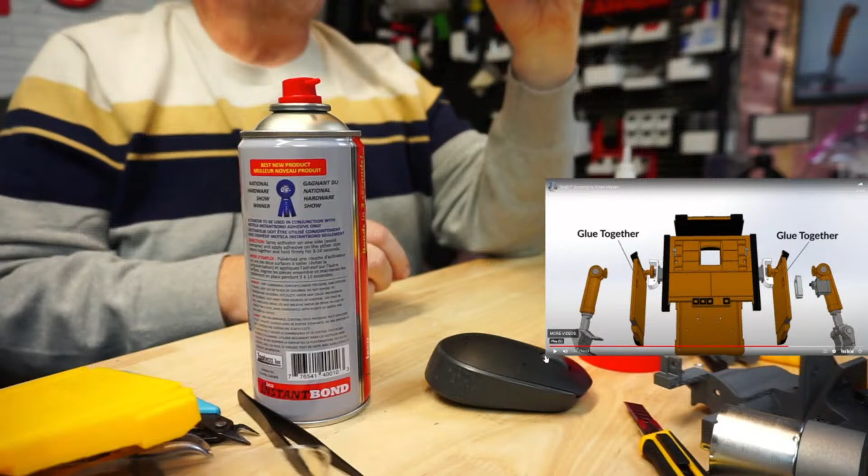No, they're both PLA. That worked. Yeah, that worked with my activator and my super glue. Something's weird, maybe there was a little bit of a springy action going on, so there might have been not a flat piece. But the activator stuff works extremely well in a situation like that. So maybe I activated the gloop too.

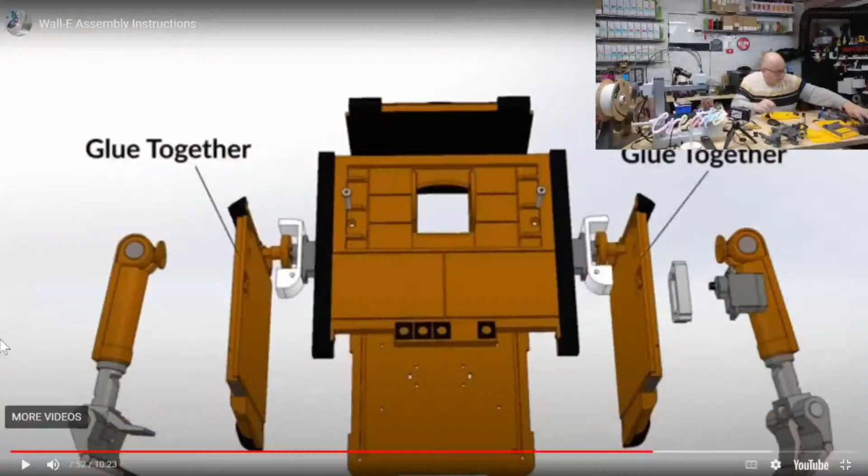But yeah, that's going to stay. That's staying right now. So there we go. So there's the two pieces there, which is going to represent the arms. That's where the arms are going to connect. So, okay, let's have a quick peek here and see what we're doing now.

Okay, so we're going to put the front piece with a couple pin hinges there. Now I was going to paint these front pieces, but I think I'm going to wait and paint them when the whole thing's put together. So let's do the overhead one here. So there's our door, and there's our front piece. There's the front right there, and the door goes in here. And our little pins for the door.

Where's my little door pins? I think that's these little yellow ones here. No, that's too big. Where are my door pins? Door pins. Oh, I saw some here. They're little yellow ones. Did I put them away in that bag when I put stuff away? I might have. Did I put them away in this bag? Don't think I did. I saw them a few seconds ago. Unless they rolled off the table on me. Oh, they're these little black ones. Here we go. I thought they were yellow. They're black.

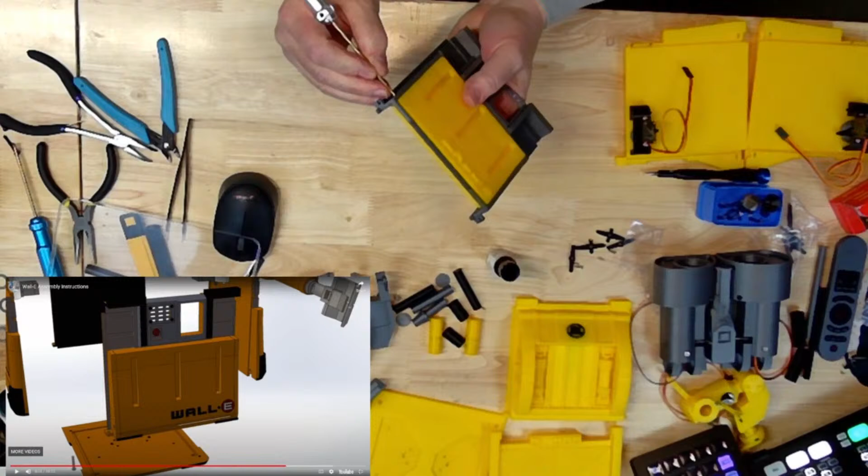Okay, let's see where we're going next. And door pins, and door pins. Let's go ahead and move forward. Okay, you can still see it in the bottom left there. Got the door pins in. Yeah, there's the lag again. I know, come on, come on. There we go.

Okay, so we're going to take that and that. Are we going to glue? Boom and boom. And we're going to come up from the bottom, put the bottom piece on, and there's 4 screws, right, M3 by 20 bolts. Okay, there we go, I see where we're going here. Okay, so this is where I need the M3x20s to go back in where they were supposed to go, but they fell out. One in there, come on, come on. Oh, you stupid blah, blah, blah, flipping blah. Sorry, I shouldn't get so upset at a little nut.

I prefer heat inserts to doing this, but I didn't design this model, so I'm not complaining. There we go, okay, we got those in there. So we have the front door, we have our back door, which was, oh, that's the bottom. Which one was the back door? Let's see, oh, I believe this is the back door right here. Yes, okay, so we have our back door.

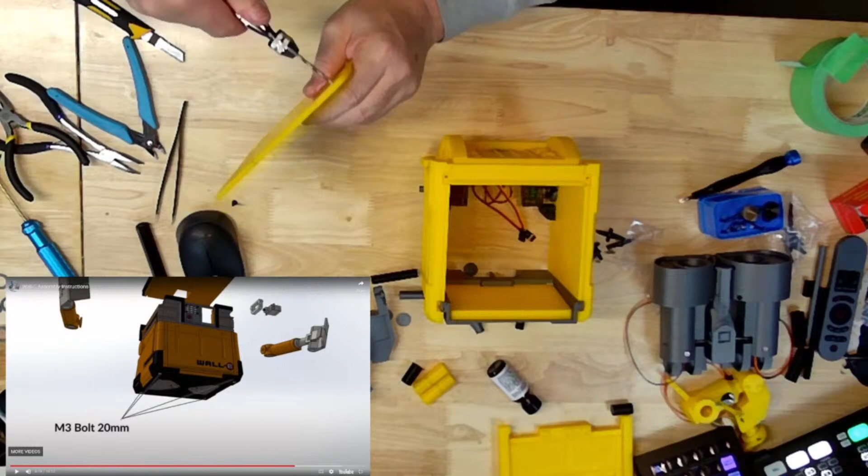You all know what's coming now. And we're tightening this one up. Something small, bits of silly putty or clay to stick. Then we're just going to quickly get these holes reamed out so that the M3s slide through there nicely. These little hand drill handle things are really handy to have if you're a builder and you do some of this stuff. It's just easy for reaming these little holes out. Okay, so now let's get this back in place where it was. There we go. Now these should slide in there much nicer.

Here we go. I'll not quite tighten that up. I'm going to be really lazy, just because I can. Really lazy. I think it's this one. No, I think it's the next one. I think it's this one. Yeah, okay, I'm just going to be lazy. That's all, guys. Sorry, I find if there's a lazy way to do it, I will find it.

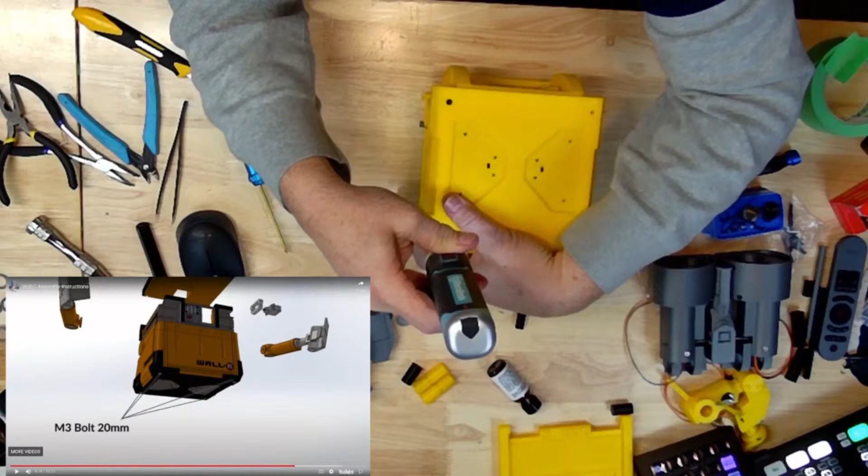Aha! That makes easy work of it. There it is, all together, all together.

Okay, let's see what's going on next in this. So we put the 4 bolts in, the M3x20s. Now we're going to put the, oh, so now the arms go on.

Now do we glue them on? And then we have another servo that's going to sit up like that. Okay, so let's just go ahead and back that down a hair, back that up a hair. Okay, so the arms go on, but I'm guessing, whoops, stop right there. Let's do this one, and let's come to the other angle here. There we go, so we have the arms over here.

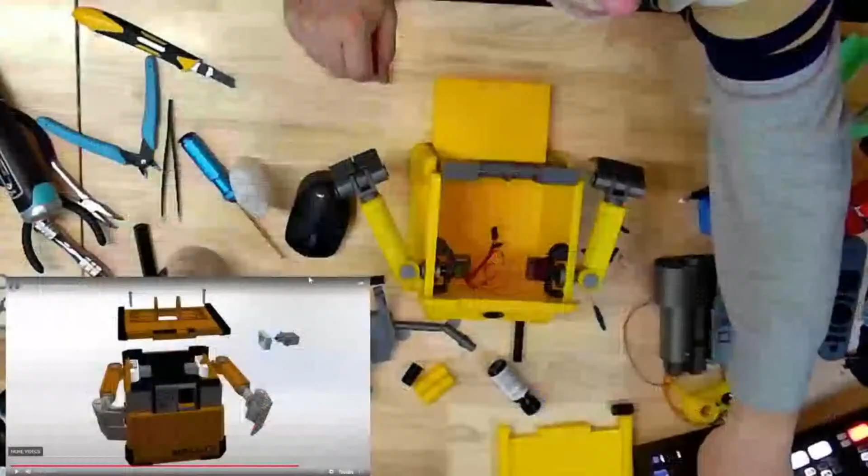Okay, so there's the arms of WALL-E. Now let's go and see what we're doing. Oh I see, okay, so underneath, after the arms are applied, it looks like we have a servo holder there. So let's go ahead and find that servo holder. That is this guy right here, and of course I printed two of them like I always do. Let's grab a servo motor.

Oh! We've got a whole slew of servos. It's like a flock of seagulls, but it's a slew of servos. Okay.

And it looks like, if I go back to the screen, oh did I get glue on my sweater? No, I didn't, I thought I got glue on my sweater.

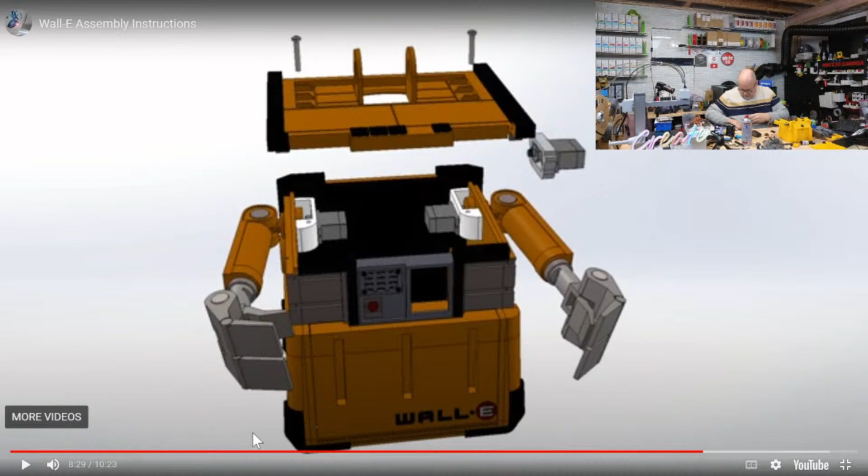So it looks like this is going to go this way around, and then the servo is going to go in this way. And we do have holes, so we're going to screw the servo into this thing.

Okay, so let me grab a couple servo screws here. Okay, these guys here, and my little screwdriver. And so the servo's going in this way.

Okay, we'll do the easy side first. Okay, get that one lined up, which it is. And we'll get this screwed in.

Okay, and what are we at? We are at 8:05, oh we're running over time. I'm going to just finish this one part, and then we'll do the draw. Oh, I'm running over time guys, so we're going to do a Polymaker draw shortly here.